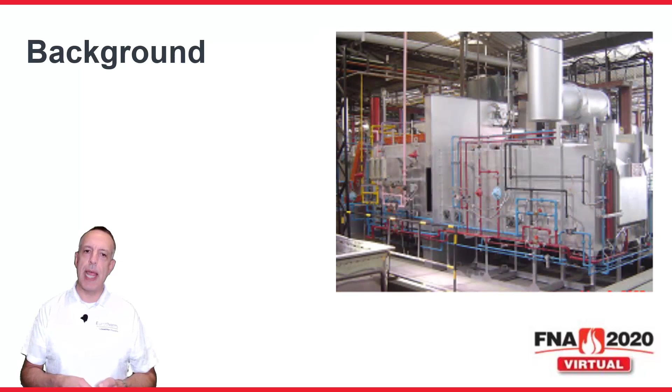I've spent 30 plus years in the industry, 20 years as a heat treater in Europe and Asia, and the last 12 plus years as a technology supplier to the industry with Eurotherm.

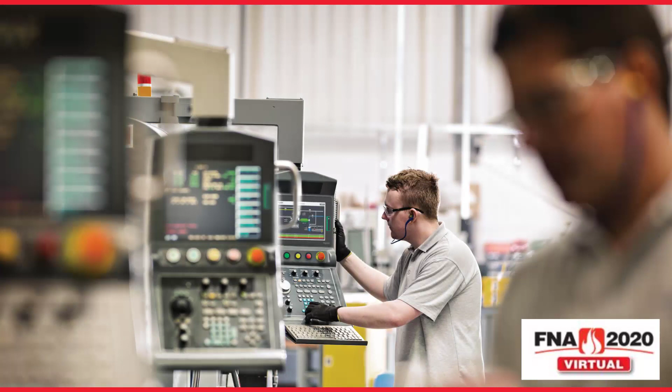In my heat treating days, I had a passion for continuous improvement in both processing and quality. Heat treat as an operation tends to be at the end of the production process, and as such, significant time, material and other process costs have been incurred before the part sees a furnace. Any error within the heat treat operation can be very expensive.

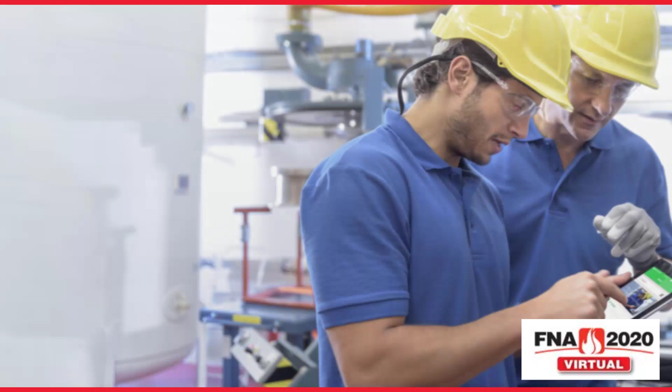That's why we try to put our operators through ongoing training both on and off the job. With a more mobile workforce and the challenges of the current environment, we have less time and resource to help an operator come up to speed quickly.

In my own experience and from 5Y analysis, 90% of issues in a heat treat shop can be attributed to operator or human error or equipment fault. And generally, time-served operators are more reliable and less error prone.

If you dive into the detail, there is usually more than one contributory factor that leads up to an operator making a mistake. And it's not as simple as just training and experience. A way to examine this is with human factors engineering. This looks at the interaction between workers, equipment, and the environment. A parallel is that AR also looks at improving the way someone can easily interact with equipment and their environment. At first glance, this looks like AR should be able to help.

Let's look at a heat treat example to explore this further. If we look at the table describing some key operator activities in the heat treatment of gears and compare against human factors rated high, medium and low, we know fixturing can potentially have high physical demands with racking materials, weights of parts and baskets. And we usually help with pallet and forklift trucks, scissor lifts, cranes, and potentially in the future with cobots. We keep skill demands and mental workload low by providing clear instructions.

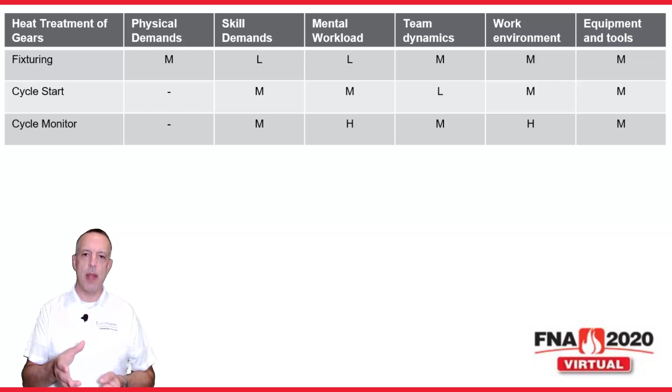The cycle monitor is where we potentially have the highest stress on an individual. This increases if the operator has less experience because it is then more difficult to make considered judgments. One of the downsides of automation is the separation from the operator and the requirement for detailed process knowledge. Cycle issues or deviations might not be rescued, with the root cause due to lack of training, not enough available time, and/or lack of or too much process information.

Okay, let's look at these categories one by one and highlight where AR can help support. So we'll go through training, instructions, time available, and process information.

Starting with training. Typically, heat treat training is event-based, in the classroom or on the job. For classroom training, time is carved out from the day-to-day work, and you generally tie up an instructor and the trainee or trainees. This training is typically carried out remote from the shop floor. Studies are now showing that this type of training, unless backed up by reinforced learning, is not very effective for knowledge retention over time.

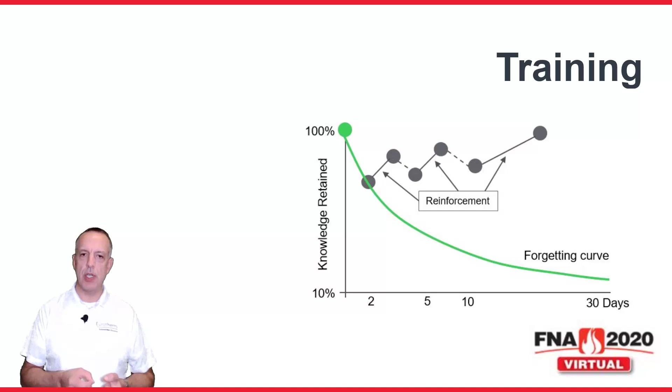On-the-job training is usually carried out during normal work activities, but you generally are tying up a supervisor or lead operator for this type of training. This training is carried out in the normal work environment with the equipment and tools to be used during normal job duties. This type of training is usually an ongoing process, so has a level of built-in reinforced learning and typically is more effective than classroom training. However, it is highly dependent on the availability and skills of the trainer, whether that's a supervisor or a lead operator.

AR training is like on-the-job training, and this can be done during normal work activities and in the normal work environment. But the benefit is that this can be done without the trainer and in short bursts of time. This can be used to reinforce on-the-job and classroom training to help retain knowledge over the longer term.

Next, let's focus on instructions. When a task is complex or performed infrequently, even the most experienced workers may forget the steps required or the order in which certain steps must be performed.

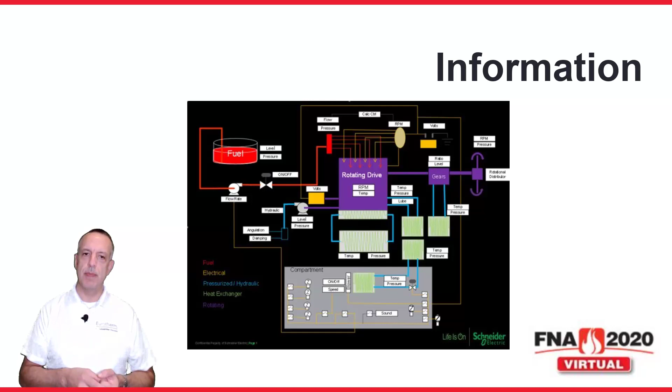We tend to focus on levels 1 and 2 and use a lot of operator training for level 3. If we did show all the information, every HMI would be cluttered and look like this. Can you guess what it represents? This is the usual view of the car dashboard.

We show only the important information that drives proper control. However, losing some context does put some pressure back on training.

Moving to AR information, this is where AR really stands out. We can still have the real-world view of the process, for instance a heat treat furnace, but now we can overlay information to help the operator understand what is going on.

So we identify alerts in context and aid level 2 comprehension. We know the data as well as the importance. To help with level 3 projection, we can add instructions in the form of procedures or workflow that act as troubleshooting guides overlaid on a real view of the situation.

As described, many benefits exist with today's practical use of AR technology. The technology has developed so that it is very easy to create AR applications in a few days rather than weeks of programming.

Okay, let's take a few minutes to see how a practical application for a vacuum furnace is created and used. These technical sessions are aimed to be 100% educational, but in order to demonstrate general functions of AR, I do need to show a quick view of the software. Please see this as one solution of a number available on the market today.

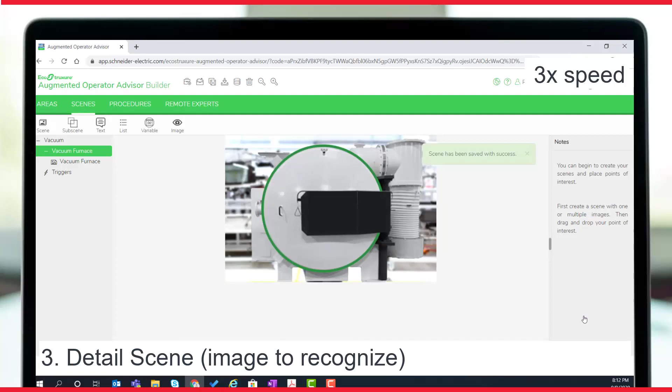In step 3, we are adding the vacuum furnace image to recognize. Step 4 starts adding the elements we want to see as overlay on our normal view. We start adding text and then more detailed information in a list, such as some detailed documents. We can also add links to external applications.

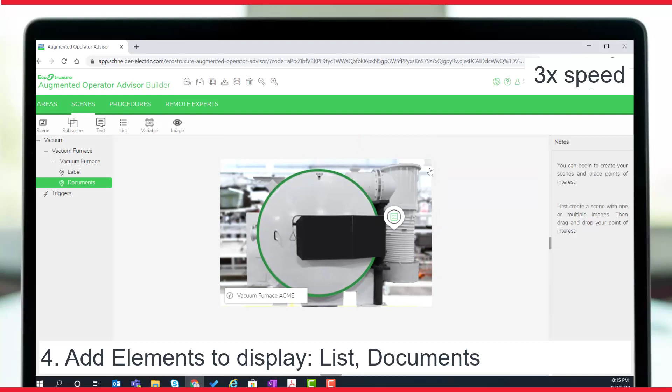Other elements are available to use, including real-time variables, but in this case we will just add a subscene illustrating a vacuum hot zone.

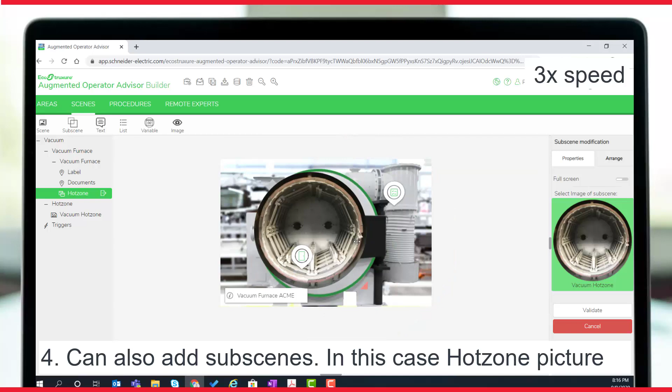Finally, in step 5, we will set up a very simple workflow for completing a temperature uniformity survey. You just need to add more steps and decision boxes for more complex operations.

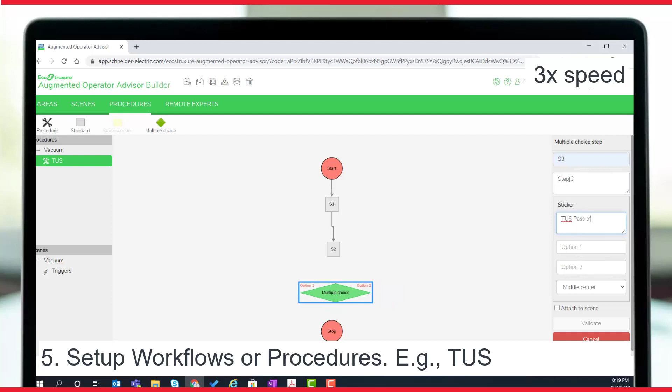Once the project elements are complete, we just run the software to build the application, and then we can transfer to the tablet.

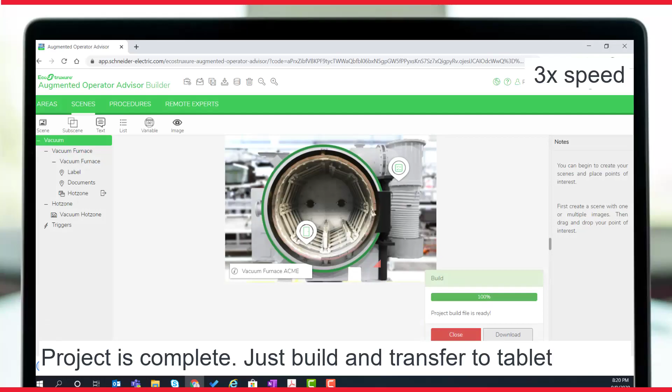Now we have the video back at normal speed, let's do a quick setup with this new project, and then we will see what an operator would see through the tablet. First, let's create a new card that links to the FNA 2020 project. We can then log in and access the scene we want to view.

Unfortunately, I don't have a vacuum furnace in my basement, so I will rely on this picture of one on my wall for the application to recognize. You see, it doesn't recognize the other images because they are not set up in this particular scene.

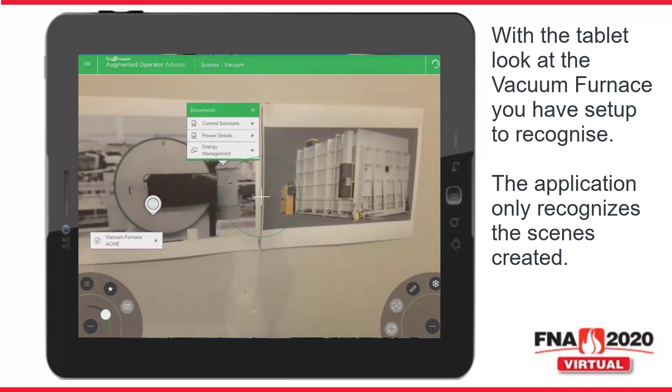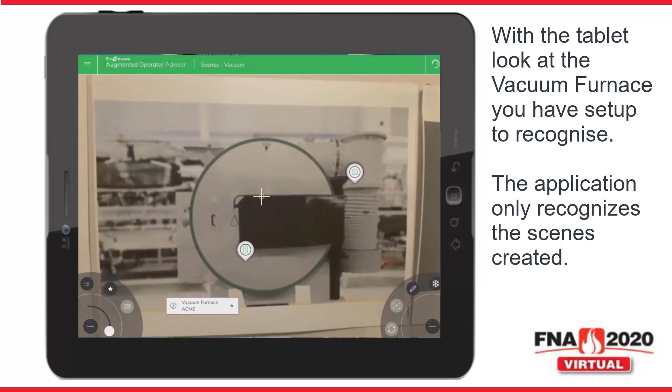Next, let's freeze frame the view so we can more comfortably look at the elements. The subscene gives a view of the hot zone.

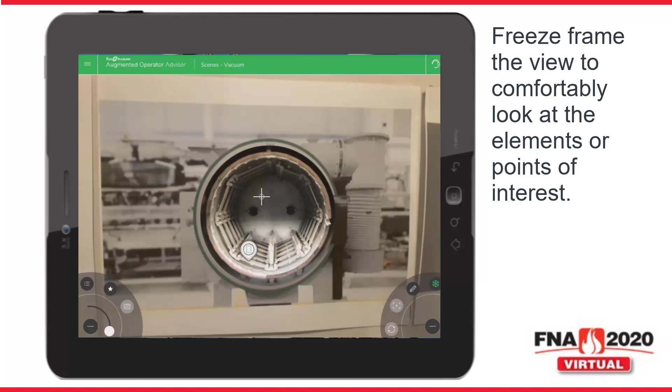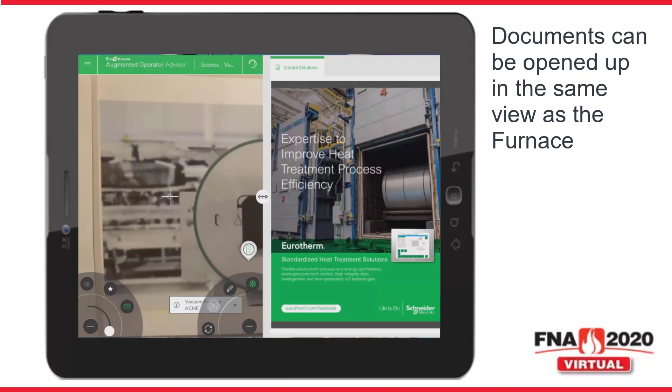Now let's have a look at the documents we set up. I can adjust the view of the documents on the screen so I can still see the vacuum furnace along with detailed information.

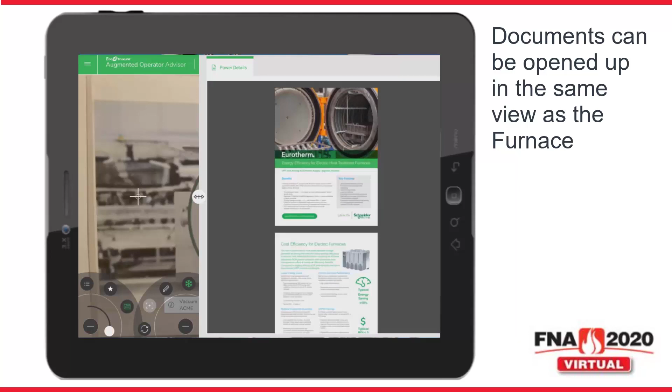Next, we will use the link to the external application. In this case, we are just referencing a web page.

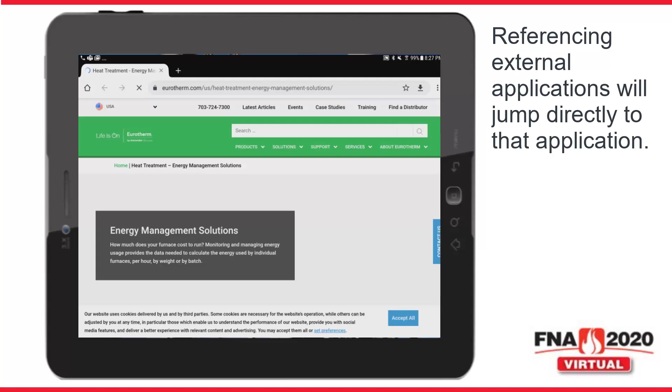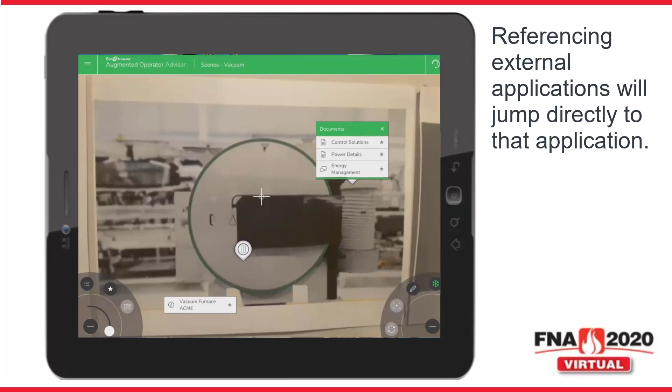Returning to the AR application, we open the procedures and show the instructions on the screen.

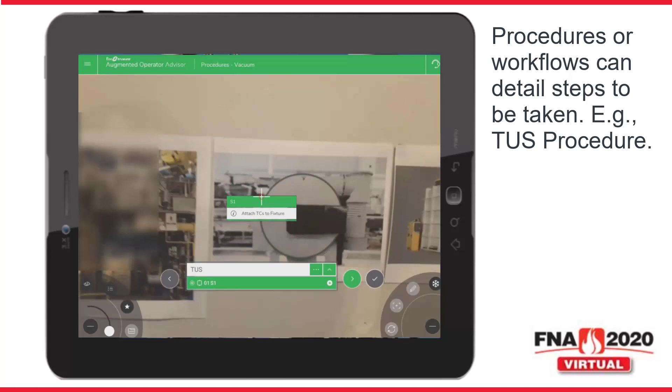The cost of this technology is also in the reach of all manufacturing industries, rather than historically being solely used in richer industries such as oil and gas. Instructions, procedures, and workflows can be tuned to exactly the needs of your particular situation rather than having to rely on generic solutions.

Let's look at some next steps to consider. In the current environment, we know that many businesses are focused on cash flow and costs, restarting furnaces to meet demand and controlling costs by focusing on critical maintenance and optimizing spend around regulatory compliance.

Following this business recovery stage, we think that most plants will start to look at transformation, gaining efficiency and flexibility through digital solutions. This is where AR can aid.

We already mentioned that smaller teams and transient workers are becoming the new normal, so we must figure out how to do more with less. Leveraging connected workers using AR tools and other digital solutions, along with evolving process mastery, will be an important focus.